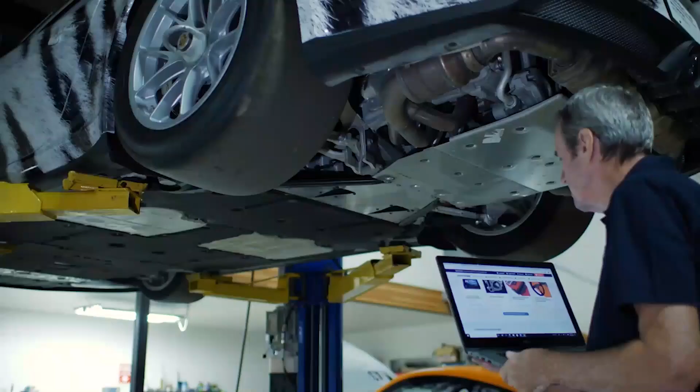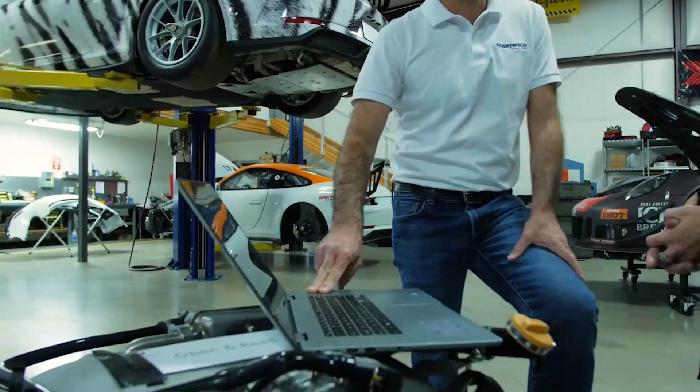The concept for EPARTRADE is basically, in my opinion, there's a big hole in the internet. The internet started many years ago, but there's never been an online business community for racers on the World Wide Web. The need for EPARTRADE is actually quite obvious. Basically, people in the business of auto racing need a place online to hang out and get their problems solved.

It's extremely simple for a buyer or for a supplier to interact on the platform. The first thing you need to do is sign in, which is free. The second thing is, when you see a product that you're interested in, all you need to do is click on request more information. If it's a company, you click on request more information, and then from there it is forwarded directly to the buyer or to the supplier.

You can go to epartrade.com, you become part of a community of businesses in racing, and it makes sourcing products much easier than just on the internet or using Google. At EPARTRADE, there is no e-commerce. It's literally a connection just like at a trade show.

So now, any time of the year, a buyer could reach out to a supplier through an email. More than that, it's a place to go just to keep current every day. So it's a good place to start your workday in your racing business or in your offices of your professional race team. You know you're current when it comes to new technology, industry news, technical papers, technical videos, all of that and more. We're not looking for a million hits per day.

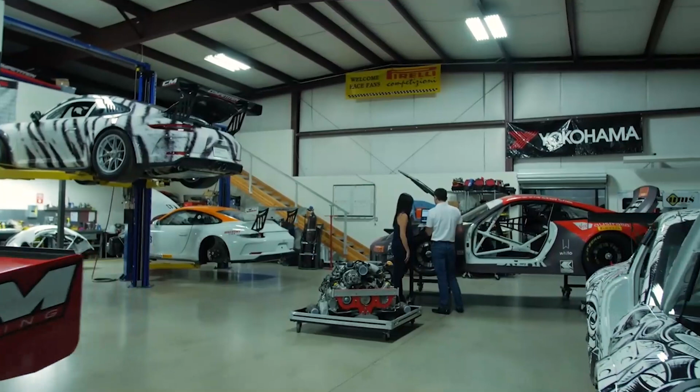All we want is people who are really the volume buyers of racing products in the racing industry to be part of the little world of EPARTRADE. We have racing businesses participating from around the world, so you get suppliers from around the world, you get buyers from around the world. EPARTRADE really eliminates having to travel, closing down your shop. Now you have a place to showcase globally your racing product and technology.

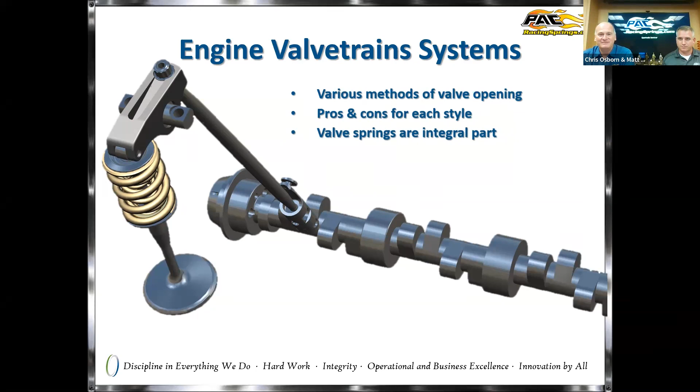Where you really want to start is looking at the camshaft. When we want to design a spring, we want to know what kind of lobe, what that profile looks like, because how aggressive that cam is really going to dictate quite a few other aspects of it. And then the cam itself, what type is it? How stiff is it? It's going to change a little bit what we need as far as the spring goes.

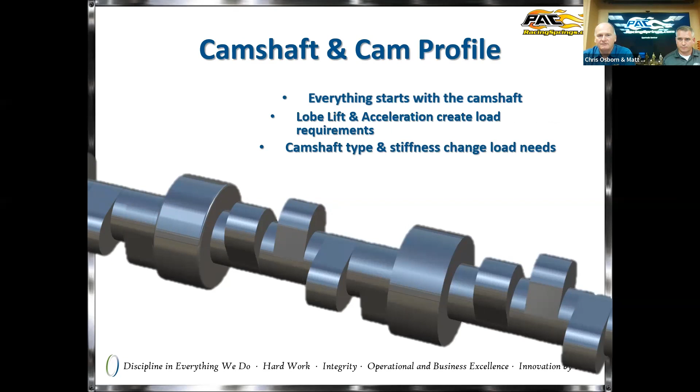Next thing is getting into the tappet. What is it? Is it solid, hydraulic, flat roller? Because you're going to be able to put different spring loads and do different things with the spring based on what that valve train type is.

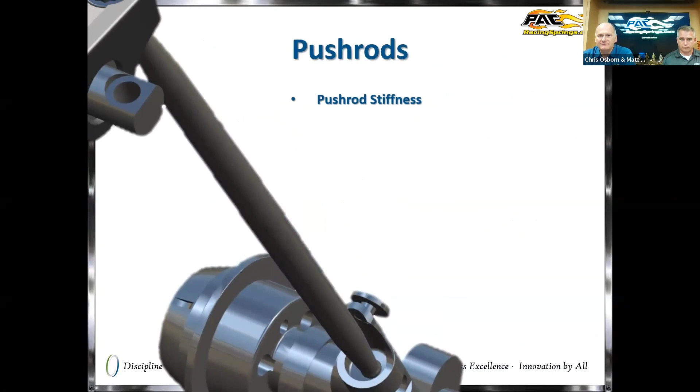And then push rods, that stiffness there is really the key thing with it. Our experience to make a spring work better is you want to put the biggest, fattest, thickest push rod you can in there, and that seems to translate that motion from the cam to the rocker to the spring better, which makes it happier from a spring side of things. This is probably one of the most overlooked aspects on a valve train. I'd agree, it's a lot better these days than it has been, but push rods have made springs better over the years.

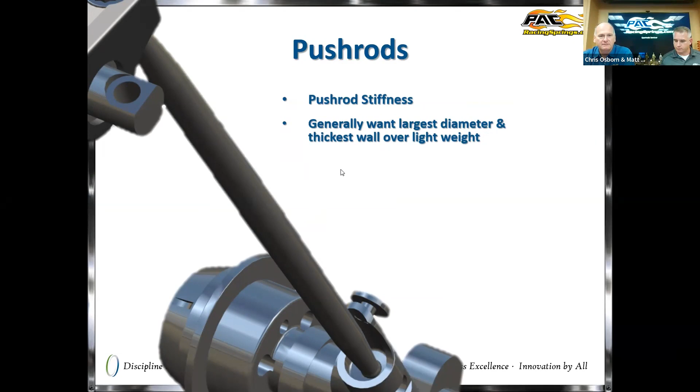Rockers, same thing. You want something that's going to translate that push rod motion into valve motion, and steel rocker arms are a lot more popular, again trying to make that valve train as stiff as possible.

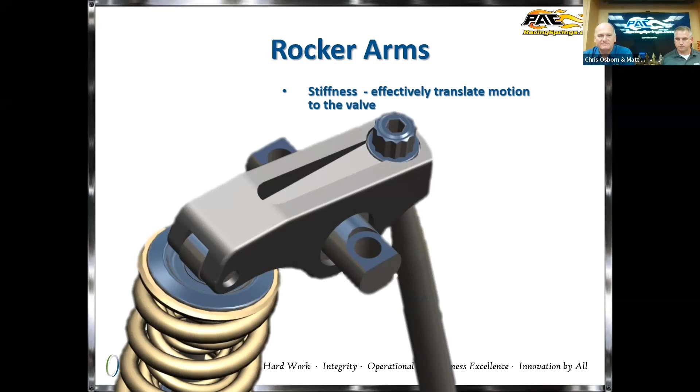Next thing that's really important is the valve. That mass on that side is really critical to the operation of the valve train. Anytime you can get that valve lighter, or anything on that side of the rocker lighter, you're going to make it easier for the spring. That's why you have titanium valves, titanium retainers, locks, even a beehive spring, because you're going to have a smaller retainer, making everything very lightweight on the moving end of the spring. That makes everything easier there.

But the biggest thing is understanding the entire system. The valve spring is just one part of that whole valve train, so you really need everything working together. I kind of look at it like a big symphony or an orchestra—you want all those instruments playing the same tune so everything sounds right. Same thing goes with a valve train: the spring's got to match the cam, the rocker, the lifter, all of that stuff's got to work together. The better we can understand what you're looking to do with your valve train, the better we can provide a spring to meet those goals.

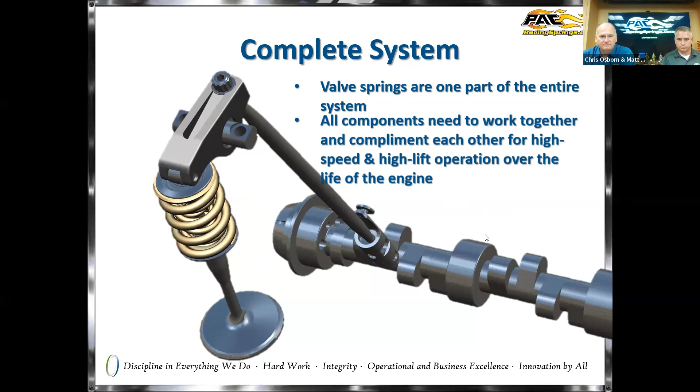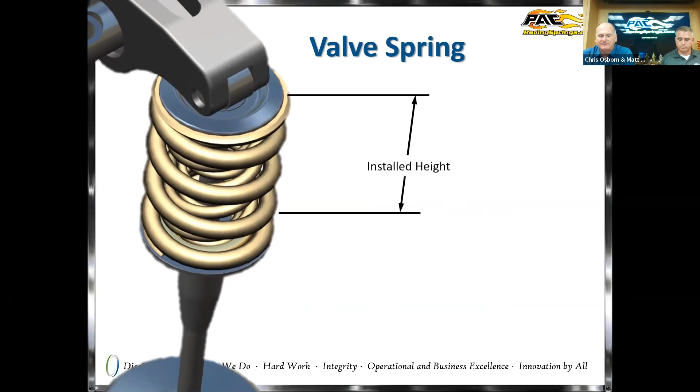Now with that, we really want to start jumping into the valve spring. Once we know what you want to do with the valve train, the biggest thing we need to understand is what installed height you have available in an engine, and how much valve lift you're going to be throwing at it. Usually, if we can get more installed height, we're going to be able to do more with the valve spring, because you're taking that valve lift away.

That room there is how much room we have when that spring is going close to coil bind, to work with putting wire in, coils, wire diameter, all that good stuff. The next thing is what's the outside diameter, and what kind of guide or inside we've got to work over. That gives us the available space we need to design a spring—that's really the key elements there.

A lot of that's dictated by engine architecture. Obviously some of the small 4-valve, smaller engines, you don't have a lot of space to do a lot with the spring, but other engines—usually big blocks, small blocks, some of the LS stuff—you have a lot more room to be able to do things. But everybody's wanting to go more and more lift, more RPM, more power, typical racer mentality. So that's where it gets more and more challenging, and that's where we've got to start getting more fine-tuned with everything we do with this spring. Now that's just looking at basic dimensions.

Probably the toughest question to answer with everything is how much force or how much load do I need with that spring? Do I need 200 pounds at the seat? Do I need 300, 500, 100 pounds? What's that? That's where it gets a lot more difficult to answer.

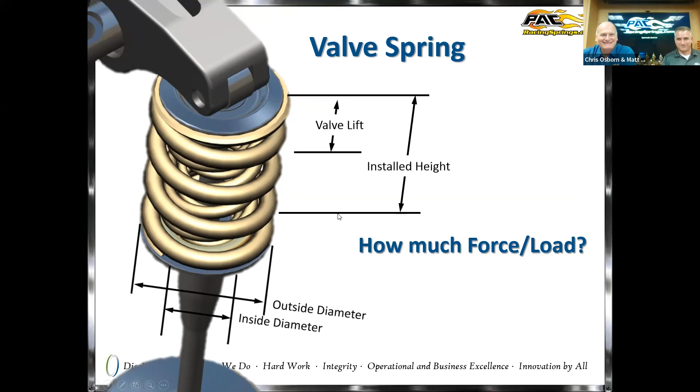That M part is all the mass that goes into that valve train that's going to be moving. So you're going to want to look at the mass of the valve, the mass of the retainer, the locks. The rocker arm gets a little trickier because it's rotating, so you've got to look at the polar moment of inertia, basically how tough is it to rotate.

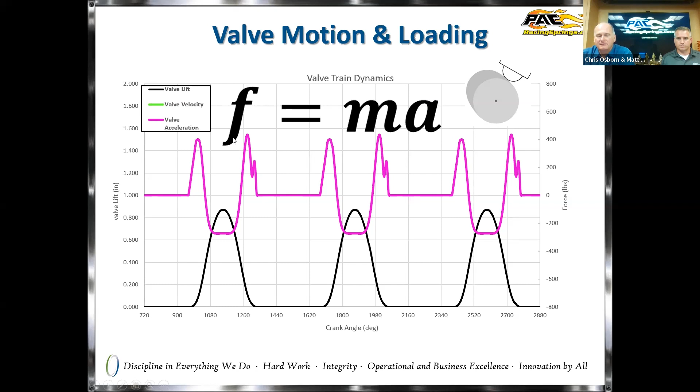So if you look at it, when you're first opening things up, your lifter, your push rod, everything is at rest, so you're trying to force that open. You don't really need any force to open that initially. But once you get going, you're halfway up, you're going to need some force to kind of slow that down, and you're going to need force over the nose.

So you can see it's a little close right there, so that's your safety margin. At this given speed, that spring is going to have that much margin. You start with, hey, there's my seat load, there's my over-the-nose load, or valve open load, valve closed load. And you can start playing with that to kind of move it up and down.

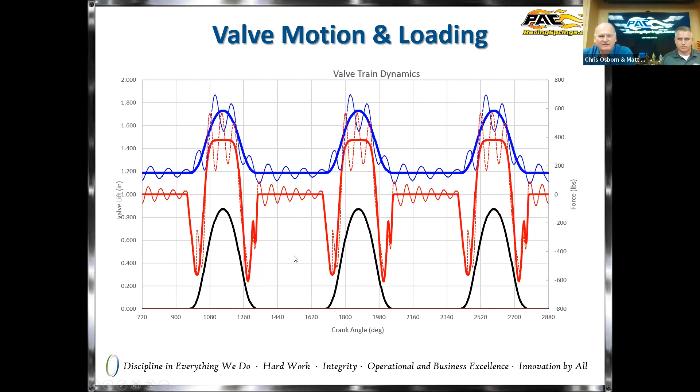To look a little bit closer, I've drawn it at low speed, and then as you go up a little bit higher speed, you can see the needs jump up and down. So at low speed, medium, and high speed, you can see you're going to need more and more spring, but the spring's starting to do funny things as well.

That's where we can play with it and say, okay, based on what's going on with the spring and what's going on with the valve train, we can start to get a good idea of what our loads need to be, and make sure that's going to keep everything together so you get the RPM you're after. That's kind of where we get those load numbers.

Usually, actually very rarely, do we ever get all the information - cam profiles, all the weights of the system. So a lot of this is we look at generic valve trains and say, okay, we think we need about this much load with this type of valve. Matt's got a lot of experience with different engine applications saying, hey, you're probably going to need about this much rate or this much initial load.

That's why we have a lot of different things in our catalog where we've gone through some of this and say, I think that's going to be optimized for these types of engines, whether it's circle track, drag race, or a street engine. But actually doing this for specific customers, it's not real common we get all that info.

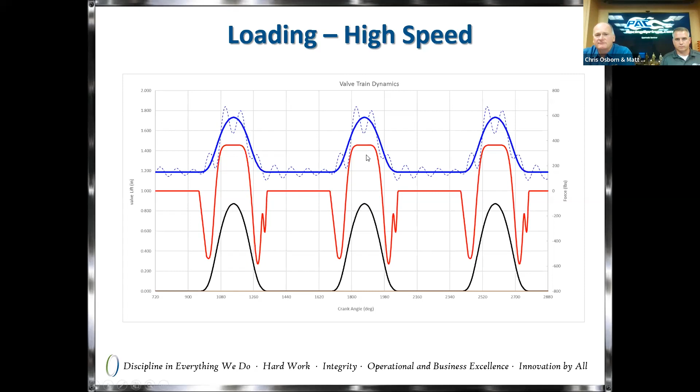But once we do get all that info, that's where we really start to say, okay, we can start designing the spring now, because you know what kind of diameters you've got to work with, what kind of force you need, what kind of frequencies you're looking to get. Then we'll start looking at it - hey, can we make it a beehive, a dual spring, a triple, a single? What do we need to do there? And that's where we really get into the math.

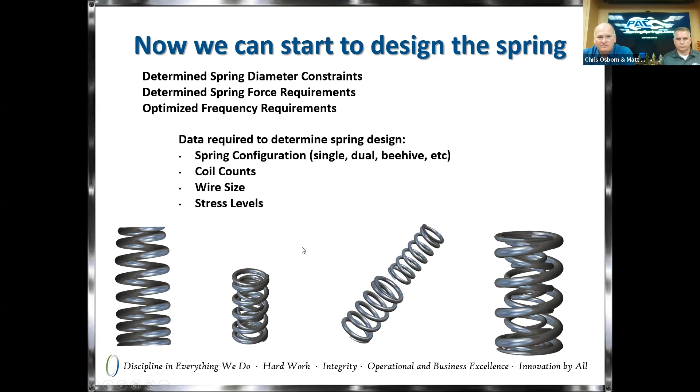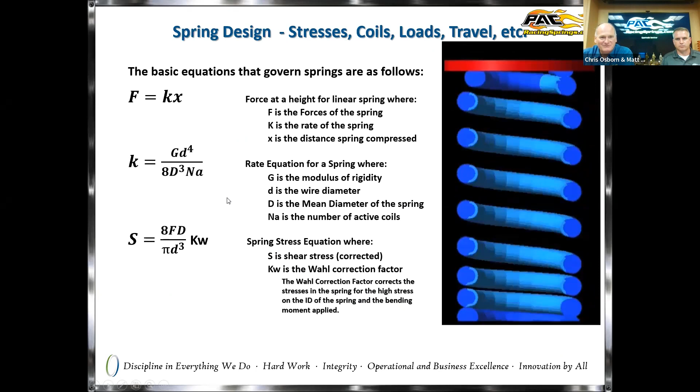The other thing we'll look at is wire shape. That's conventional round wire spring, it's got the stress on the ID. But we've done a lot with ovate wire, where what you're doing is where you've got the high stress on that wire, we're putting more metal there. So you're going to see in the FEA the stresses go down where you put the extra metal, and it's going to kind of go on the flanks of the wire. But what also happens is you make that wire thinner, so you can get lower coil bind heights on the spring. It's a little tricky with ovate, but it definitely offers a lot of advantages in some applications.

The other part I want to talk about— Stop you right there, sure. I got a question for you right here while you're talking about that, two different types of wire.

Does it lend itself to higher RPM engines better, or is it really more applicable for, you know, low end, big torque type engines that don't see, you know, high RPM, let's just say in excess of 7,500, 8,000 RPM?

We generally see more of the ovate on more of the street engines, because you're generally more limited on the installed height. So you want to put a big lift, but you can't really do much with installed height, because ovate wire is great, but it does offer some more manufacturing challenges. Your tooling is more complicated, you got to keep that point, the wire directly at that center line. So it's a little tougher from that standpoint. That's why you don't see it on some really high race engines. We're getting there, but that's part of some of the development that's kind of ongoing, is how do we really implement that shape on higher and higher revving engines.

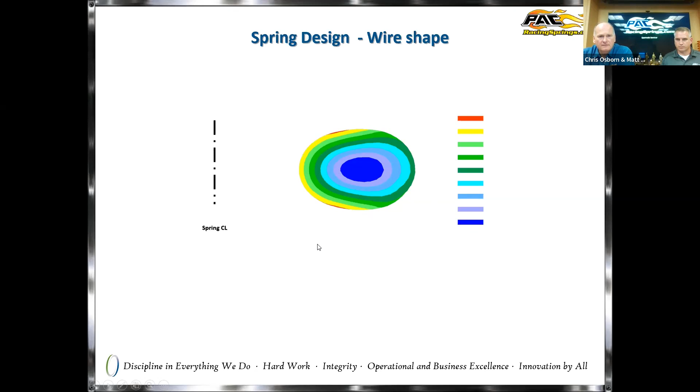Next thing I want to talk about is frequency a little bit. The frequency is basically like a guitar spring, or a guitar string that you pluck, and that's kind of what's going on with the spring. So if you took that spring and plucked it, it would bounce up and down like that. And that's basically a ratio of the rate of the spring divided by the active mass. And what you want to try to do is get as high frequency as you can, but you got to be careful in that, because as you drop the mass and increase the rate, your stresses go up. So it's a big balancing act between stress, frequencies, rates. There's a lot that goes in with it.

So if you get a lot of installed height, you can do more little tricks like this. Or you can use ovate wires so that you can get more coils in it, so you can start to put these damping coils inside there. So that's some of the modern ways that really wasn't understood in the past on how to make that spring dampen out better, without using some of the multi-coil springs or dampers, OD dampers, ID dampers, some of the other things that were out there.

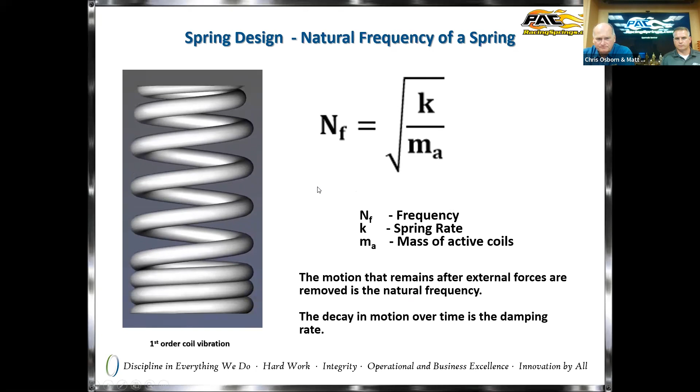So once we kind of had the spring put together, then we want to kind of put that back in the valve train and look at it from a little more simulation standpoint, and understand, hey, what kind of dynamic stress are we getting within that spring?

Is it controlling the valve like we want? Are we seeing too much impact? Because if the spring's really slamming the valve back closed too hard, the spring may be fine, but it's going to put a lot of stress on that valve and break the head of that valve off.

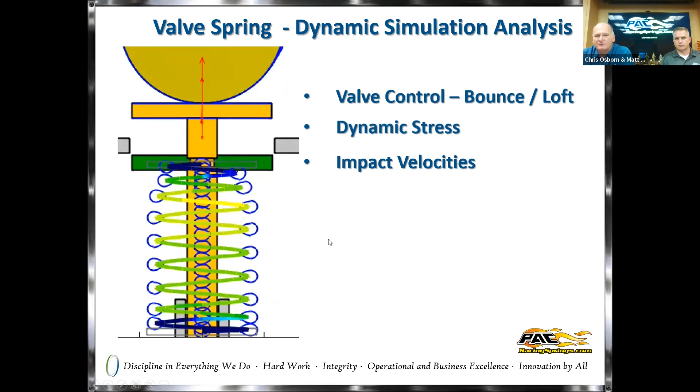So again, it's a key component of that whole valve train. You need to work the rest of the system as much as you work the spring. They've got to work together in harmony there.

Now, once we have that spring set, we understand the design, the coils, the wire size, the diameter, the free length, we have everything put together. That's really only one piece of the pie, but that's what most people understand: hey, I've got a spring with this many coils and it's a dual or a beehive.

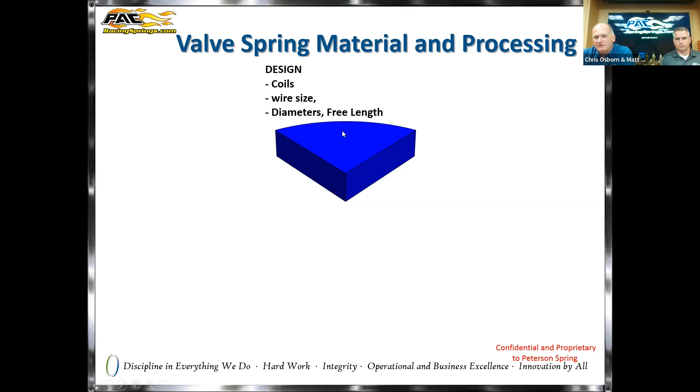And then you may want to look at material a little bit. There's been a lot done with materials. Not a lot of difference in alloys, but a lot done to make it a cleaner alloy, so you don't have inclusions in there, or you can go a little higher tensile strength without having to worry about it failing as readily. But still, that's only two smaller pieces of the pie.

The biggest one is how we process the spring. In the past 20 years, I've seen huge changes in the way springs are heat treated, the way they're shot peened, the way the surface is enhanced. And that's just greatly increased the performance of the springs.

That's why some of the drag race stuff that was in place 20 years ago, you see that same type of lift on a street engine now. And it's all due to essentially how that spring is processed.

So that's been one of the really cool things to see over the past several years, is what you can do just trying different things. We're really fortunate here where we work, we've got a pretty fabulous test lab and metallurgical lab where we can try all kinds of wild ideas and evaluate it and see if it makes everything better or not, without having to go to customers and say, hey, try this, hopefully it doesn't break your engine.

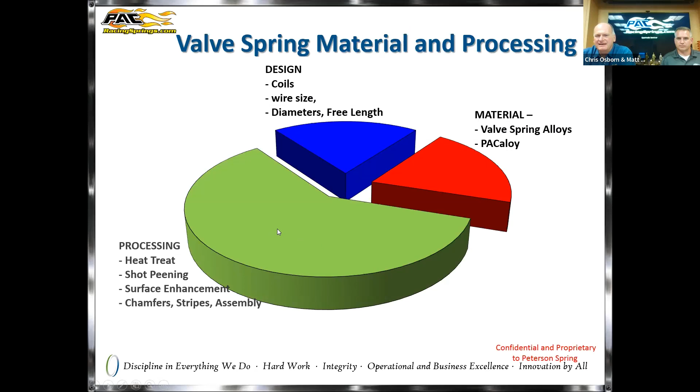But the big question, let me go back there, is how do we choose some of that? Once we know that spring, how do we choose a material, or how do we choose the right process? Especially today, it's like, okay, I want the best material, the best process, but that may not be a good value for what you're trying to do.

You're trying to make 1,000 different springs for 30 engines or whatever. You've got to watch your cost.

So what we do, we take that one step further, and we evaluate the spring, and we look at the stresses on what we call a Goodman diagram. And what that does is we'll plot where that stress is going to be.

And then, as I mentioned, we do a lot of testing here with our fatigue life. So we understand, if you test a spring at that point, if you go above that, it's going to fail. If you go below that, it's going to last for 1 million cycles, or 10 million, or 50 million cycles. So we can look at that from different materials, different processes, whether it's nitride or heat treated or different alloys. We have a lot of these different lines, and we compare where that spring design falls in relation to those fatigue lines.

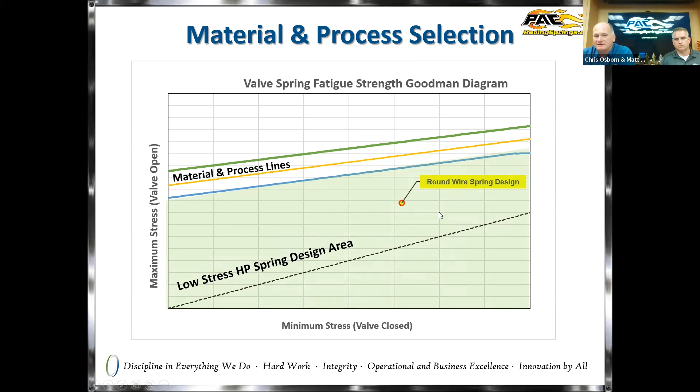And we'll look at different areas of this curve. So if it's down here, it's a pretty low stress, you're pretty safe. Unfortunately, it's probably not going to work well for you in a racing application because you don't have enough frequency, because it's too conservatively designed. So we need to be kind of in that yellow line or up in that green line to really make a high-end spring. But we need to know it's not going to be an infinite life on that spring, it's going to have a finite life.

But we'll design springs to fall in different areas. But probably one of the biggest things is when we design a spring, we have a lot of springs out there in the world that we've designed. We have a lot of experience, in some cases 20, 30 years of experience.

So we can compare, hey, we know this application uses a spring like that, and we're down here, so it's going to be very, very safe from a material and a processing standpoint. So that's the way we choose it.

It's just a lot of experience, a lot of analysis that we go through to put those last pieces of the puzzle together. That's probably one of the most misunderstood parts of a spring: the material and the processing that go into it. That's where a lot of companies keep their secrets. That's our secret sauce, our secret recipe that you're not going to get a lot of info out of us on. We're going to tell you what's better, what's not, or what's going on with the spring, but we're not going to give you the details on the shot peen recipe or heat treat recipes or anything like that.

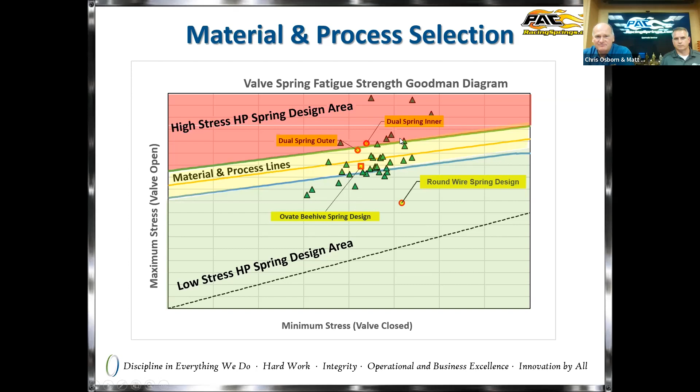But we're always working on that, tweaking it, evaluating it. What can we do to make it better? Once everything's all said and done, we're going to put a print together, and it's going to spell out the dimensions, the wire sizes, everything that goes into the spring. We have that for every spring we make, all our catalog parts. We've got prints, and another piece you won't see is that recipe on how it's made. Some springs only have about 5 steps, pretty simple. Other high-end springs may have 30 or 40 steps. So there's a lot that goes into a spring that's just not apparent.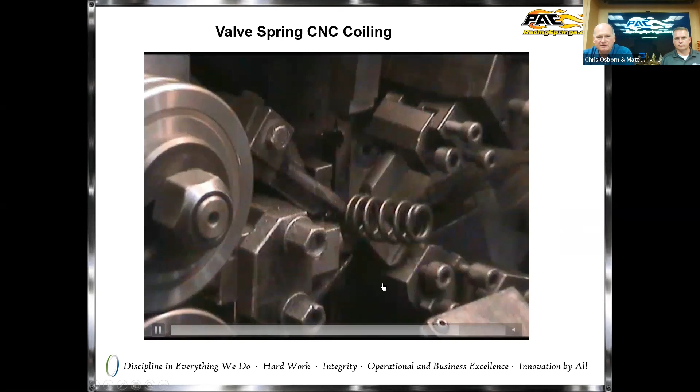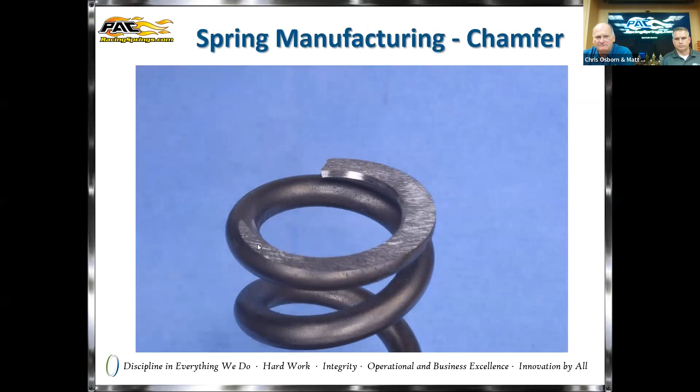And going into the spring, it's going to kind of look like that. The next step is we're going to grind the ends, both at the same time. That's where you set your solid height, your tip thickness, your area of grind, squareness, those features. We may put a chamfer on it, like shown there. We'll shot peen it after that.

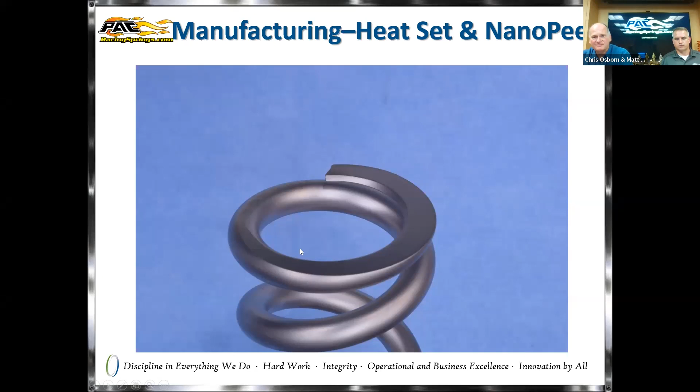And then we'll do some of the last steps. We'll heat set it and do some nano peening, another surface enhancement where we really put a lot of what I'm going to call residual stress. That's what I'm going to jump into next, because it's probably the most misunderstood and not really talked about feature of steels and springs, and it really dictates whether a part's going to last forever or not. It's very critical, and it's not understood, but it's going to give you the reliability and durability on the spring.

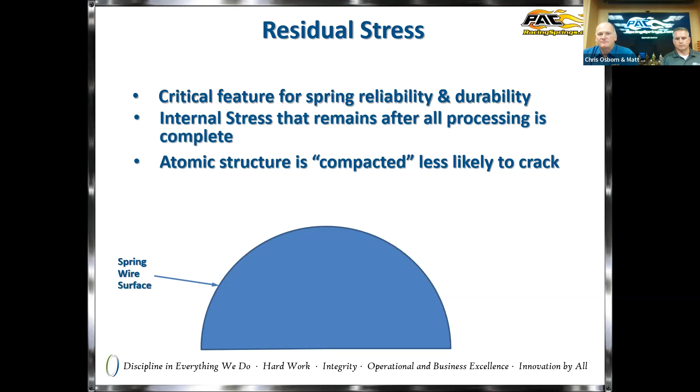It's essentially the internal stress that remains once you're done processing it. What's going on is you're taking that atomic structure, that crystalline structure of the steel, and trying to compact it slightly. If you can do that, you're making that material hold together better, so you're less likely to crack when you're putting all this stress to it.

Shot peening is a really great example of what goes on. To give you a little visual: if you got a little piece of shot that comes in and hits that spring and leaves, you're going to leave a little dent. At the bottom of that dent, you've essentially compacted that steel in that little area. Now instead of just one, you're going to have millions of these little shot peen impacts, giving that dented surface. What's going on is you're compacting that surface and making it last longer, giving it a higher residual stress, what we call compressive stress.

And that's what's really key to making the spring last. We're not just going to do it once, we're going to do it in multiple stages. We're going to nano peen it, enhance that surface, so we're going to have a very high residual stress on that surface. So it's a delicate surface. You don't want to beat on it with a hammer or put a dent in it. You want to treat it like an egg, essentially. And that spring's going to hold up very well.

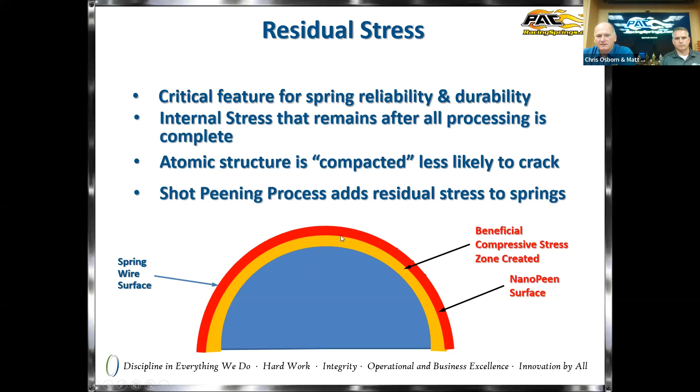Now that residual stress, we've got a way to measure that here. We've got what we call an X-ray diffraction, where we can zap it with a beam of X-rays, and we can measure how well that surface is done. And what we're trying to do with all our development is drive that curve deeper and more in magnitude on the surface.

So the more we can drive this down, the longer that spring's going to last. And that's some of the improvements that's happened over the past several years, with our nano peening, or with how we heat treat, or some of the processing that we do. That gives that spring so much more fatigue life. And other parts, you see it with gears, connecting rods, bolts. All this is trying to improve fatigue life by driving that residual stress deeper. It's just a spring, it lives or dies on this, and it's just not as obvious as it is on other parts.

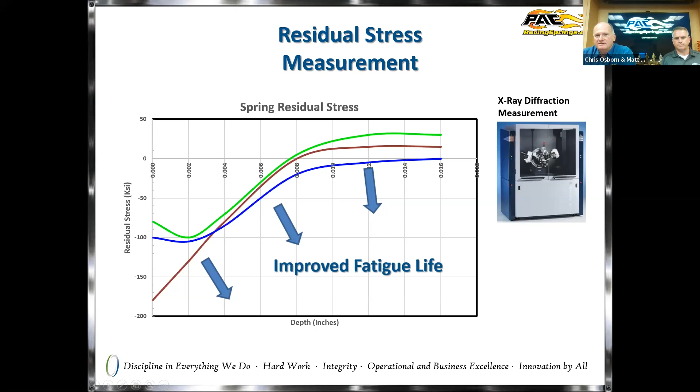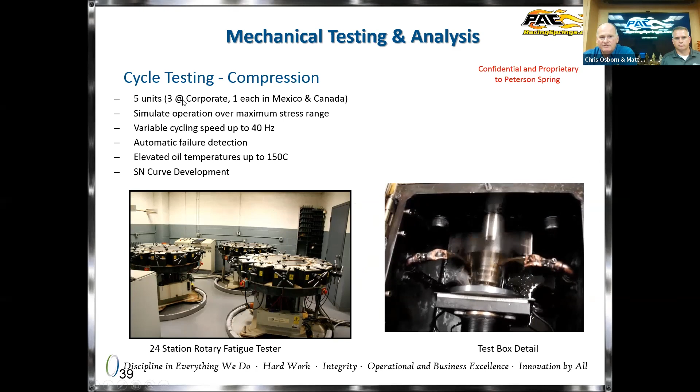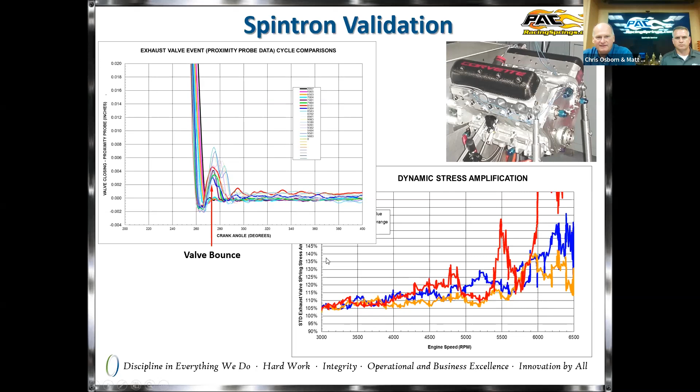And then lastly, we're going to do some high-speed video if we can, just to see what's going on inside that valve cover. Hopefully we don't get too scared when we see it. But yeah, that's some old NASCAR stuff, Steve, or Jeff, that's what was going on inside your valve covers when you were running around the track there.

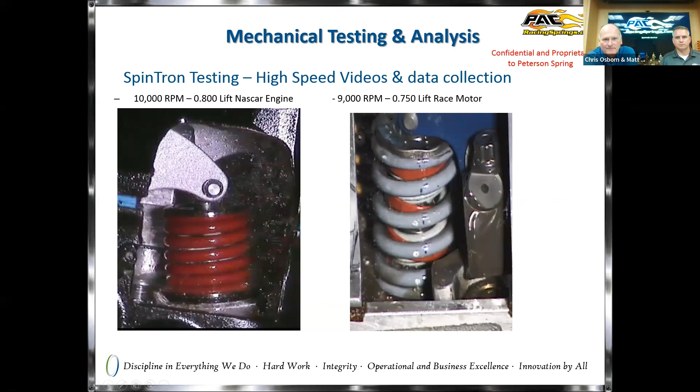So that's what goes on to making a spring. Stop share up top. Stop share. So that's what we do.

There's a lot to it. Like I said, the more you dive into it, the more you realize you don't know and want to learn. That's for sure.

Well, again, you've given everybody a lot more insight, I think, about especially the technical part of it. Everybody understands, yeah, we got to twist this thing up. You got to heat treat it. You got to do all this stuff to it.

But at the same time, the finite stuff, like you were showing us there with the peening process. And I remember working around Junior, being around Jack Roush. I mean, these two guys, they were very sensitive about connecting rods and valve springs, because they felt like if those two things fail, that cancels Christmas. And they worked extra hard on making sure that there were no imperfections.

And what I can see here, that's what you've gotten down to, is trying to make sure that those imperfections that are there are, I guess you might say, getting purged out or consolidated or condensed down to where they don't become a problem, correct? With your peening process, I'm talking about, in particular, that you were showing us.

But it's, again, that's the technical side of it. And I think a lot of folks, including myself, if I was, I've helped build engines, but I haven't gone in and built my own engine in so long. It'd be like going back to grade school and starting over. So making sure you understand how to go about putting together the right package, kind of like cherry picking your engine and you want to work on it.